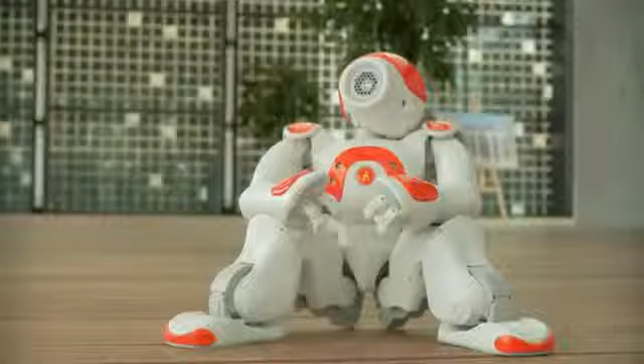I want to come with you.

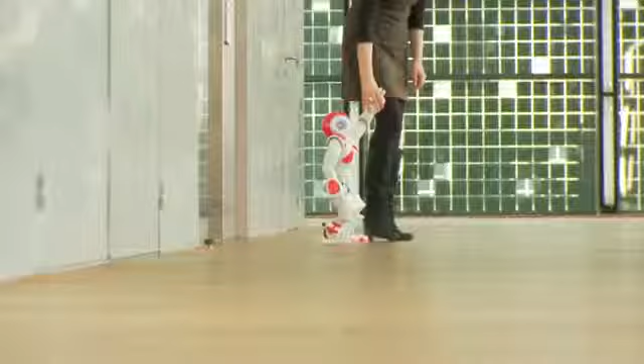Our goal with robots is to have robots helping people, and not only the geek. I want to have robots helping everyone. But in order to do that, we need to have the robot accepted by people.

I'm Bruno Maisonnier, head of Aldebaran Robotics, founder and CEO of the company. Give me something, please.

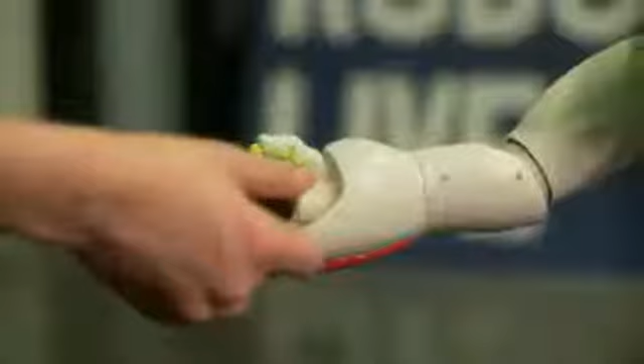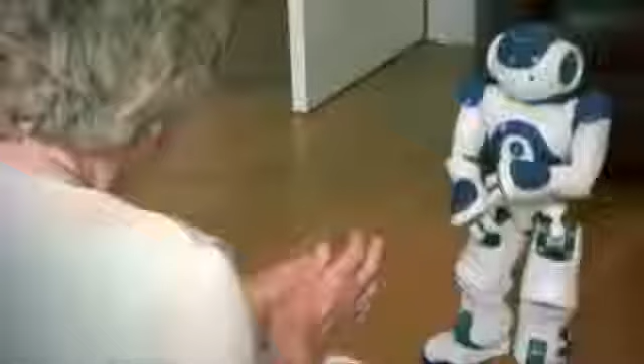We think that the robotic market is going to be huge in the future. And this comes from the simple fact that the world population is aging very fast. And we need robots to do whatever they need at home.

What do you want me to do? When people are depending on someone else, they need to have someone else helping them, they are in a secondary position. But when they have a robot doing that, they are in the first position. They are leading.

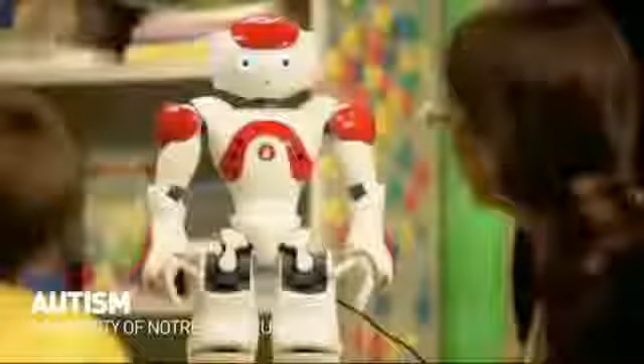Notre Dame University in the United States, they are really working with robots helping autistic kids. We discovered that robots are objects they can interact with, they are comfortable with interacting with robots, they like it.

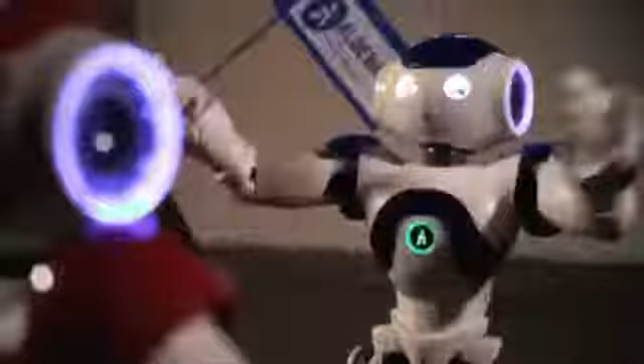The first impression that you get when you see the robots is the outside shapes. If the shape, if the form is too aggressive, you won't interact with that robot.

There are many people ready to develop softwares, but we are just lacking robots. We are just missing robots. So that's why Aldebaran began with a platform for providing all those who want to explore this new world, who want to be part of this revolution, to be able to do it.

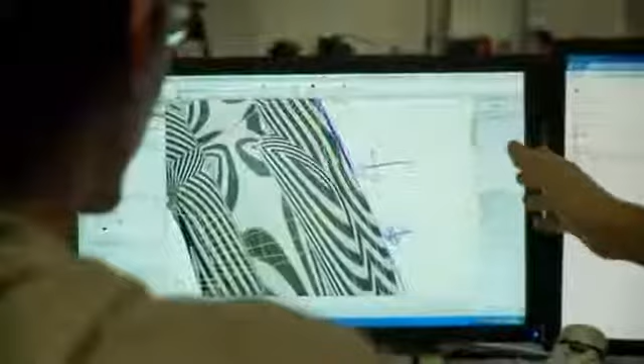I've been working for Aldebaran Robotics for 5 years as a mechanical engineer. I especially work on designing gears and integrating motors into the platforms we develop at Aldebaran.

Like Ludovic, I am also a mechanical engineer. I mainly work on the shells, but also on internal parts and the structure.

For each project, the process is similar. We start with sketches, essentially 2D images, that we then translate into digital data and 3D volumes using SolidWorks surfacing tools.

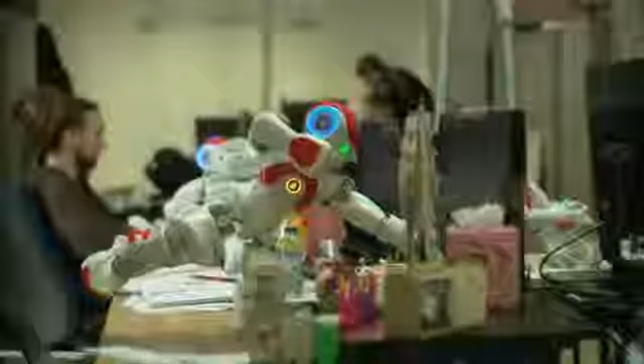This gives us the ability to rotate the pieces and robots in the space and to improve the design when it's not as pure as we want it to be.

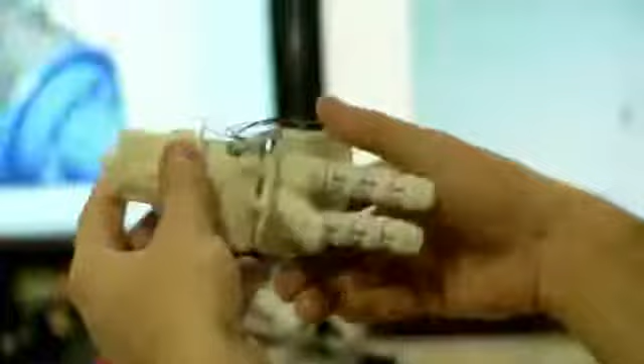So we start with the exterior design of the hand as we have here. It is smaller than a human hand. It's the size of a small child's hand. And inside there are over 100 parts just for one hand.

In addition to all mechanical constraints, we have 2 degrees of freedom that we have implemented in this hand, and SolidWorks allows us to look at all the possibilities and optimize the mechanical design inside the hand.

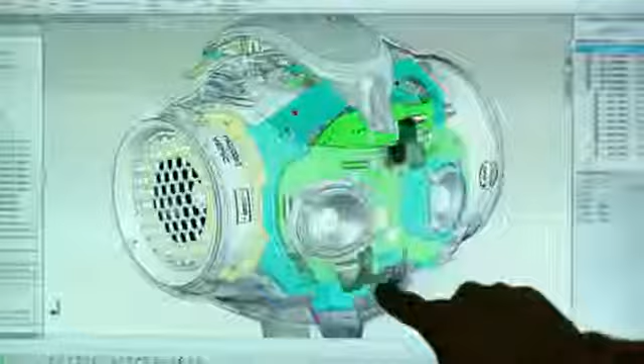Even more complex is the robot's head, which combines mechanical, electronic, and optical components, like cameras, for example. One might say that all NAO's intelligence is gathered in its head. There are also LEDs, microphones, and speakers.

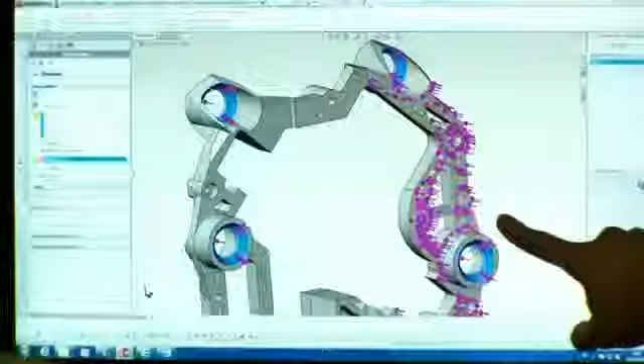We use SolidWorks simulation, which allows us to generate digital models and know if the part will resist to shocks or not, based on stresses we apply to it. And once we have proceeded with validation in SolidWorks, we can move on to production.

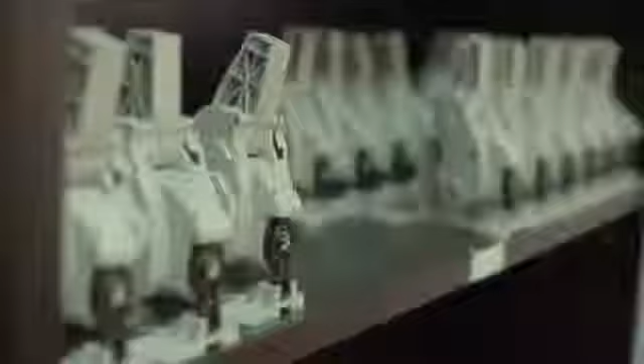We use SolidWorks in order to project the product into the future, and we can really optimize, really improve the parts before it exists, before it is manufactured. You have to know that into that robot there are more than 1,200 plastic parts.

On my team there are 45 people working on the design, and I need to orchestrate the daily work and make sure that when we create new parts, the version is correct. So for that we use EPDM, and it helps us to focus on innovation while EPDM is taking care of the structure of the project.

I hate the techno stress. I don't want to have devices that are asking me to invest intellectually to understand how they're working. And so I don't want my robots to create techno-stress to people.

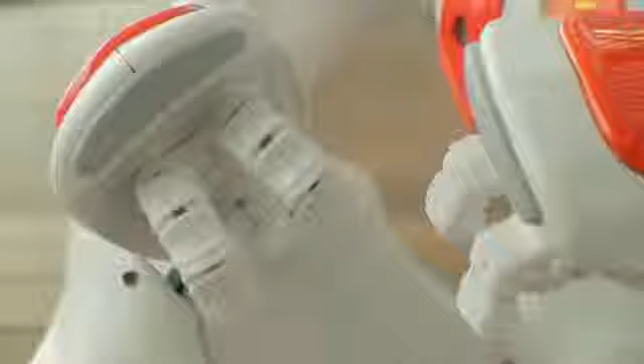When you want to change the world, to improve things, you have to go beyond what you are able to do. You have to decide to go for something you don't know how to do. It's a new territory to conquest. Shall we try something new today?